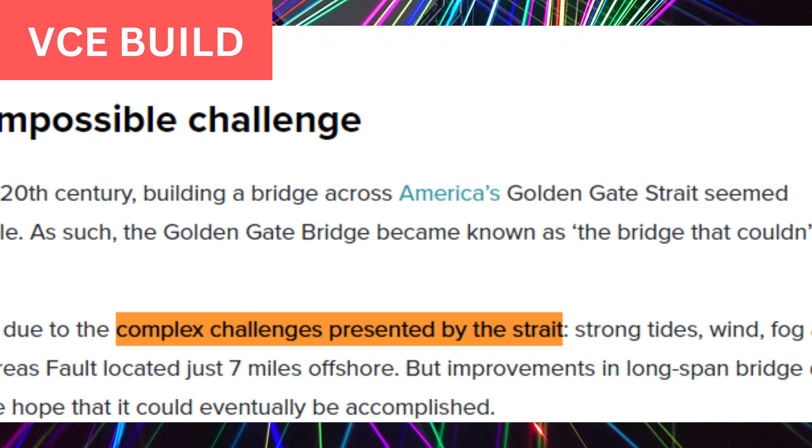Like all projects, challenges were faced during construction. The Golden Gate Strait has powerful tides and currents, which made anchoring the bridge's foundations extremely difficult. Workers had to contend with unpredictable water conditions while building the underwater supports. San Francisco's thick fog and high winds often reduced visibility, complicating the construction process, while high winds tested the stability and safety of the incomplete structure and the workers.

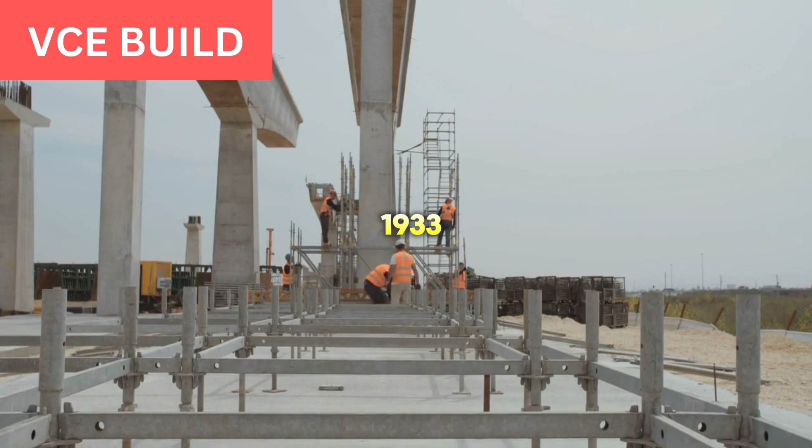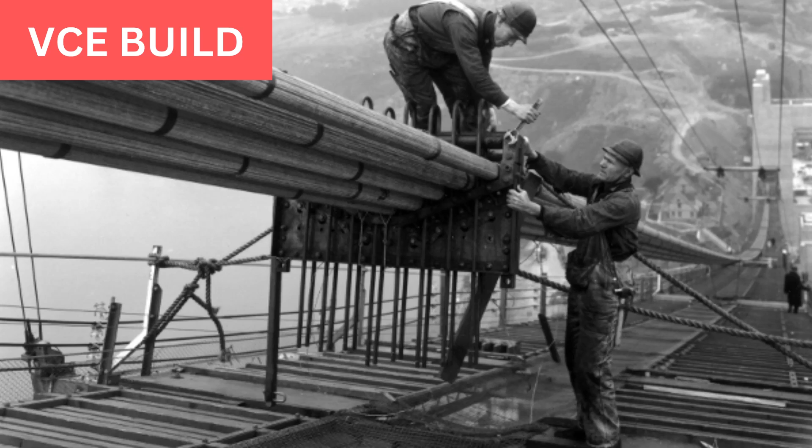Since construction of the bridge began in 1933, during the Great Depression, securing funding was a challenge. Despite this, the construction of the bridge provided jobs and boosted the economy. The design itself had to ensure stability against the strait's strong winds and potential earthquakes. Coordinating the construction of such a massive structure required precise logistics and scheduling—transporting materials, managing a large workforce, and maintaining construction timelines were all complex tasks.

2. The next bridge we will explore is the Tower Bridge, an emblematic symbol of London, constructed between 1886 and 1894, during the height of the Victorian era, a period marked by industrial progress and architectural innovation. The bridge was conceived in response to the need to create a new bridge that would alleviate congestion without disrupting river traffic in the bustling area of London.

Designed by architect Sir Horace Jones and engineer Sir John Wolfe Barry, the Tower Bridge embodies the distinctive Victorian Gothic architectural style evident in its pointed arches, detailed stonework and ornate appearance. The bridge was meant to harmonize and complement the historic surroundings.

One of the bridge's most remarkable features is its bascule, also known as a drawbridge mechanism, which allows the roadway to split and lift so that ships can pass through. At the time, it was a groundbreaking feat of engineering. The hydraulic systems that made this work were powered by steam at that time; it has since been updated to electricity.

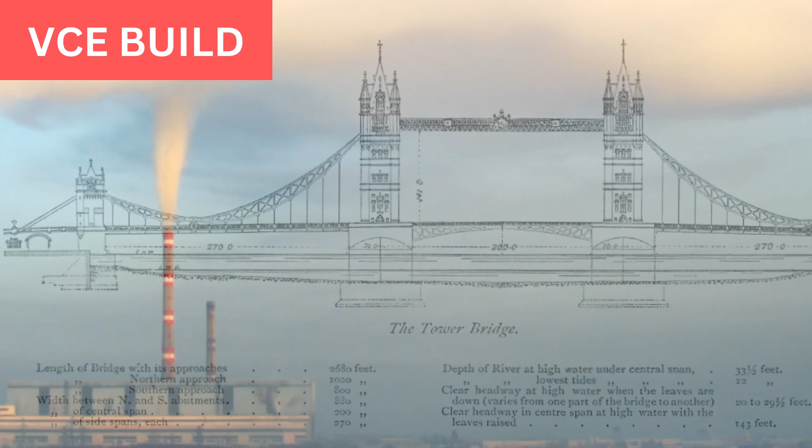Tower Bridge's combination of aesthetic grandeur and mechanical ingenuity not only addressed a critical infrastructural need but also created an architectural icon. Today, it stands as a testament to Victorian engineering and remains one of the most recognizable landmarks in the world. Tower Bridge boasts several unique design features that set it apart as an architectural and engineering marvel.

The bridge's iconic twin towers, constructed in the Victorian Gothic style, are both functional and decorative. These towers house the machinery for the bascules and provide structural support for the suspension elements of the bridge. The design, featuring pointed arches and detailed stonework, ensures that the bridge complements its surroundings. Connecting the two towers are high-level pedestrian walkways, originally designed to allow pedestrians to cross the bridge even when the bascules were raised.

These walkways provide stunning views of London and the Thames, and today they house exhibitions, which makes the bridge not only functional but also culturally significant.

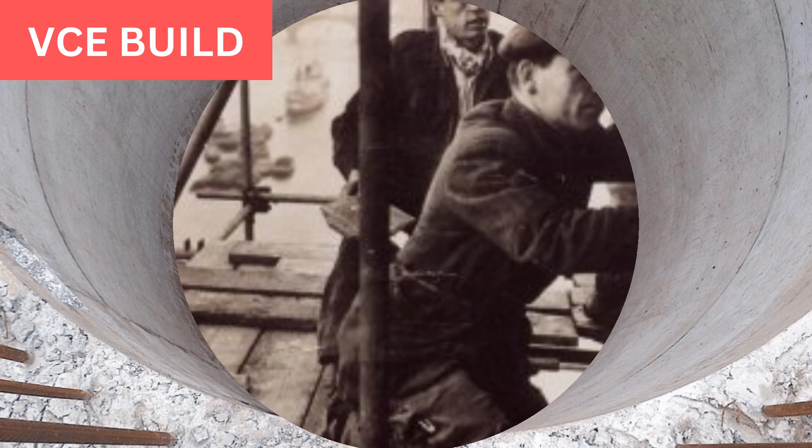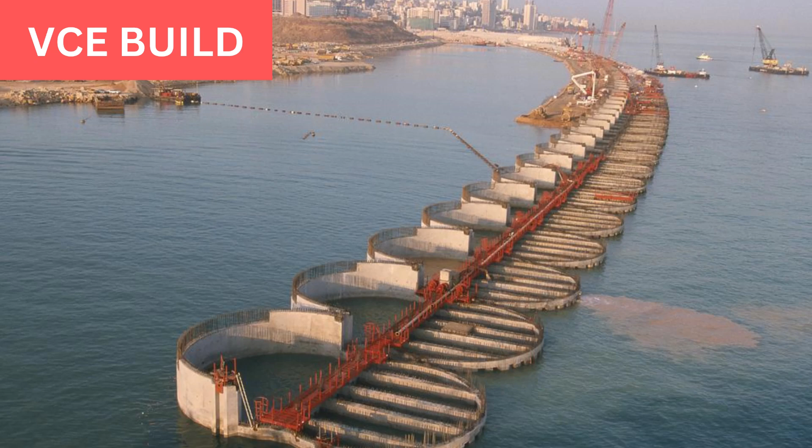The construction of Tower Bridge presented numerous challenges requiring innovative solutions. The riverbed upon which the foundation was built was muddy and unstable. To rectify this, large caissons, watertight structures made of timber and steel, were sunk into the riverbed, and the water was pumped out, allowing workers to excavate and build the foundations in dry conditions.

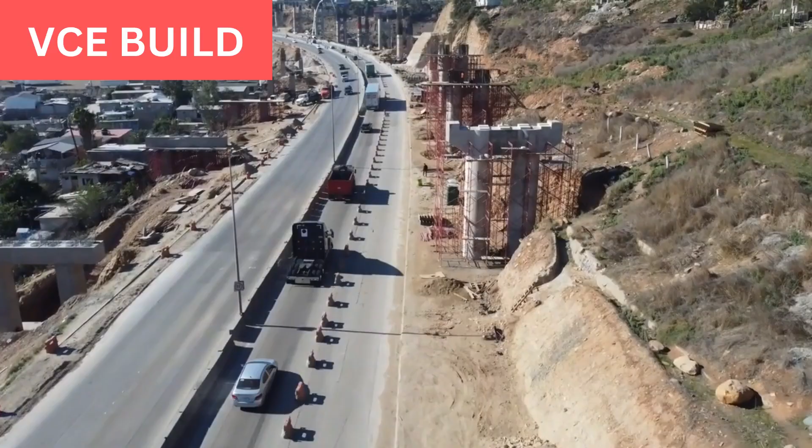Another challenge was supporting heavy loads. The bridge had to support the weight of the towers and the bascules. Suspension chains and robust piers provided the needed support. The towers were constructed with strong steel frames and granite, and Portland stone was also used for added strength and durability.

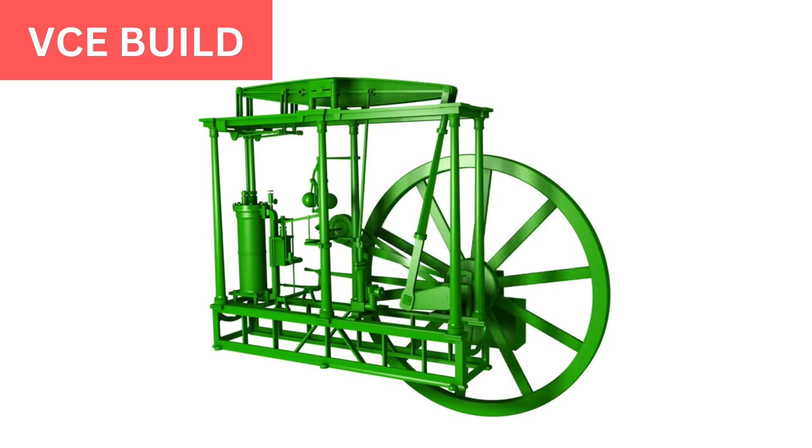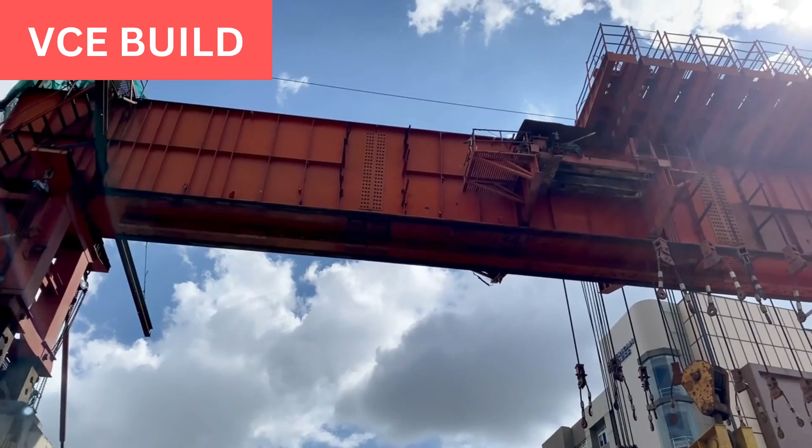Another challenge was designing a reliable mechanism to lift the bascules and allow ship passage while maintaining roadway functionality. Engineers implemented a state-of-the-art hydraulic system powered by steam engines, which operated large pistons to raise the bascules. This system was later upgraded to an electro-hydraulic system, ensuring continued efficient operation.

To ensure that construction did not disrupt vital river traffic on the Thames, it had to undergo careful planning and scheduling of construction activity. The construction was completed in phases to ensure at least one channel of the river was always open for ships. The use of stone cladding on the steel framework provided the desired Gothic look while ensuring the bridge's strength and stability.

By addressing these challenges with innovative engineering and careful planning, the builders of Tower Bridge were able to create a structure that was both functional and visually iconic, enduring as a symbol of London's architectural and engineering heritage.

The Akashi Kaikyo Bridge, based in Japan and also known as the Pearl Bridge, holds the record for the longest central span of any suspension bridge, at 1,991 meters. Completed in 1998 after a decade of work, it was engineered to withstand earthquakes and harsh weather conditions.

The need for the bridge arose after a tragic ferry accident in 1955 during a severe storm, which claimed 168 lives. This incident underscored the necessity for a safer and more reliable crossing.

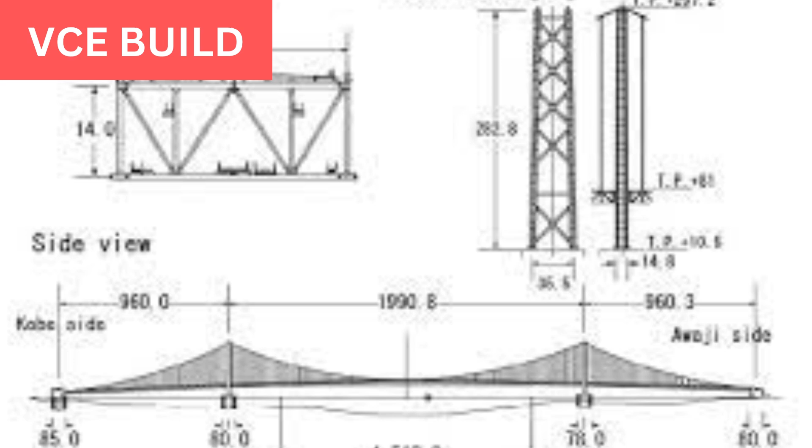The bridge is not only an engineering marvel but also a testament to advanced earthquake and windproof design. Engineers incorporated cutting-edge technology to ensure its resilience against harsh weather conditions, including frequent typhoons and seismic activity. With towers standing 282.8 meters high, the bridge's total length reaches 3,911 meters, supported by 300,000 kilometers of steel cables.

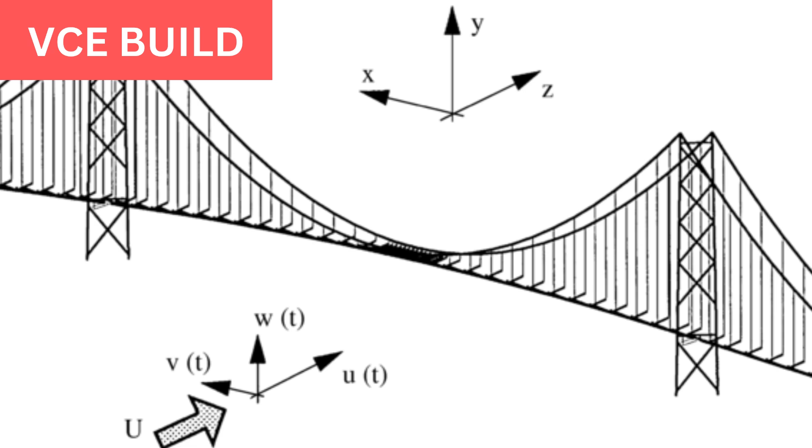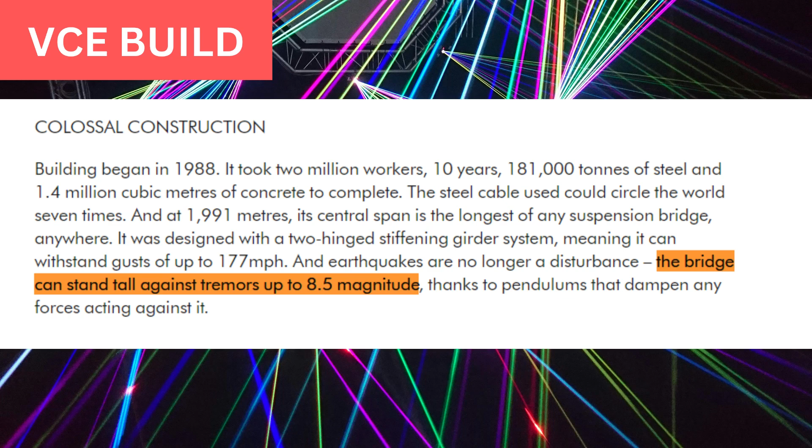For the bridge to withstand potential earthquakes, engineers incorporated advanced seismic isolation techniques, including massive bearings and shock absorbers, to allow the bridge to absorb and dissipate seismic energy. This design ensures the bridge can withstand an earthquake up to magnitude 8.5.

The Akashi Strait presents a major challenge. The bridge experiences strong ocean currents and severe weather conditions, including typhoons and high winds. These factors complicated the construction process, particularly in anchoring the bridge's massive towers.

To address these challenges, construction teams used caissons and specialized underwater techniques to anchor the bridge's foundations securely. They also implemented robust construction methods to handle the harsh marine environment and incorporated weather-resistant materials.

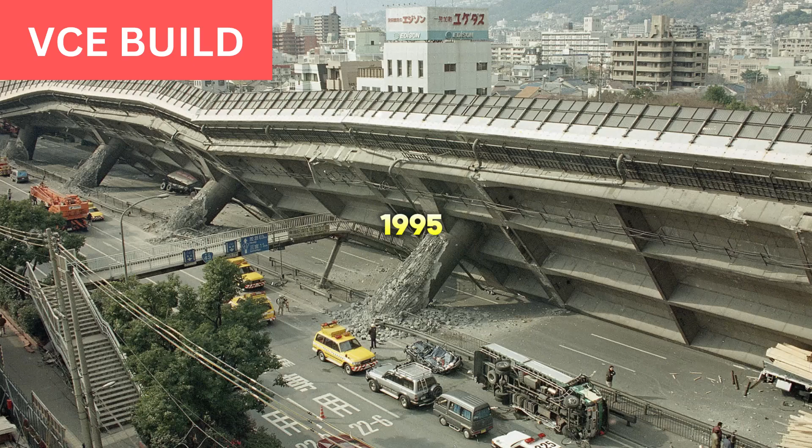The construction was severely impacted by the 1995 Great Hanshin earthquake, which caused the two towers of the bridge to shift by approximately 1 meter. This delay pushed back the project's completion and increased costs.

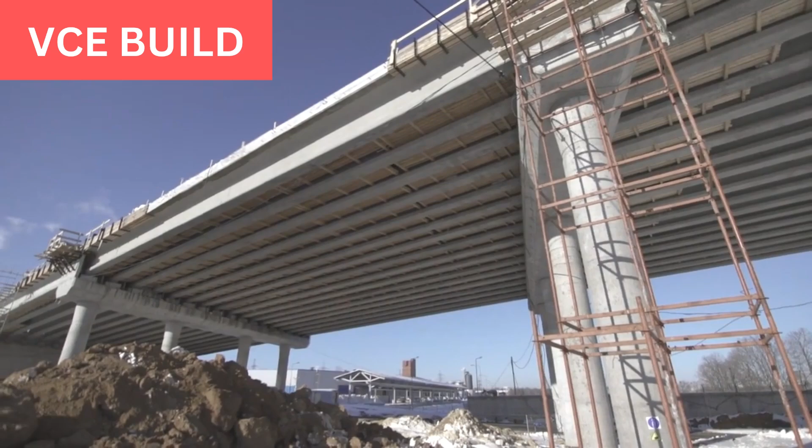After the earthquake, engineers had to adjust the bridge's design and construction plans to address the damage. The towers were reinforced, and the project timeline was extended to ensure the bridge met safety and design standards.

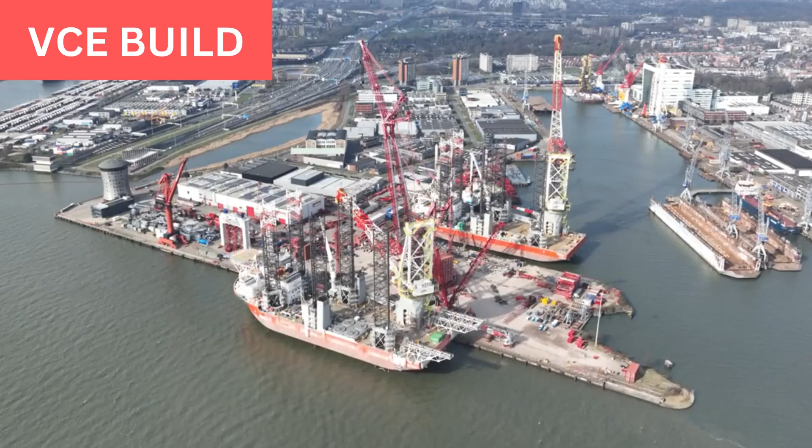The bridge's construction required precise engineering to manage the enormous scale and weight of the components, including the massive steel cables and bridge deck. Engineers utilized advanced technologies for measuring and aligning the bridge's components accurately. Special construction techniques, including floating cranes and large-scale prefabrication, facilitated the assembly of the bridge's massive elements.

Building a structure of such scale in a busy maritime area raised significant environmental and safety concerns, particularly regarding pollution and the safety of maritime traffic during construction. Measures were taken to minimize environmental impact, including using barges and careful management of construction materials. Safety protocols were strictly enforced to protect both workers and maritime traffic.

These challenges, along with natural disasters, highlight the engineering ingenuity and resilience required to complete the Akashi Kaikyo Bridge, making it a landmark achievement in modern civil engineering.

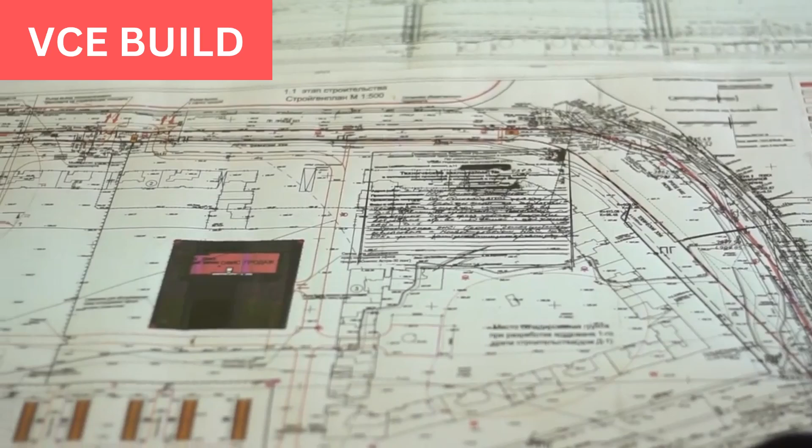The Sydney Harbour Bridge, sometimes known as the Coat Hanger due to its distinctive arch shape, was completed in 1932 and remains one of Australia's most well-known landmarks. We will delve a little further into some interesting elements of the bridge, including the challenges faced during construction and innovative methods used to construct it.

Designed by engineer John Bradfield, the bridge was built to connect Sydney's central business district with the northern suburbs, addressing the growing transportation needs of the city. Construction began in 1923 amid the Great Depression, a period of economic hardship, and the bridge's development was crucial for boosting employment and supporting economic recovery.

The Sydney Harbour Bridge is a vital piece of infrastructure, significantly improving transportation across the harbour and fostering urban growth. It has become a symbol of Sydney's progress and resilience, often featured in celebrations like New Year's Eve fireworks and national events. The bridge features a massive steel arch that spans 503 metres across Sydney Harbour, making it one of the world's largest steel arches.

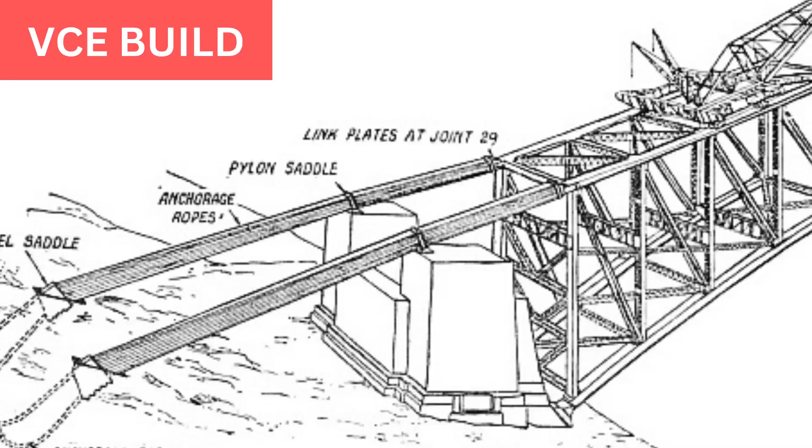The arch is supported by massive concrete and steel pylons at either end. The arch design allows for the long span needed to cross the wide harbour, providing structural stability and allowing for the bridge's road and rail components to be positioned below it.

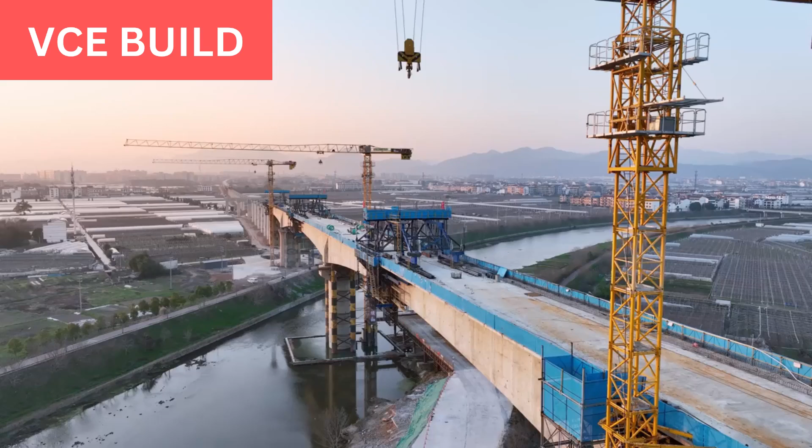Construction process and obstacles faced. The construction of the Sydney Harbour Bridge faced several significant obstacles, which required innovative solutions and perseverance to overcome.

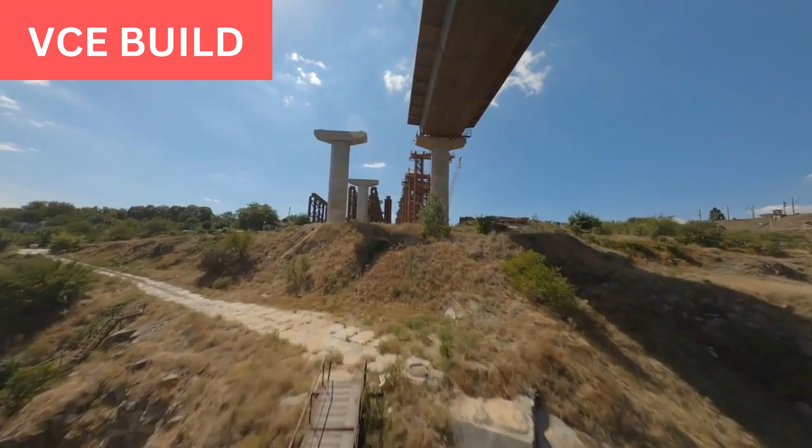Obstacle: the bridge was built over a busy harbour, requiring construction to be carried out in a challenging marine environment with strong tides and fluctuating weather conditions.

Solution: engineers employed innovative construction methods such as cantilevering sections of the bridge from both sides of the harbour, which minimized disruption to maritime traffic. Temporary platforms and safety measures were used to manage the challenging conditions.

The construction involved working at great heights and in hazardous conditions, leading to concerns about worker safety. Aligning and connecting the bridge's massive steel sections, especially those built on either side of the harbour, presented significant technical difficulties. Engineers employed precise measurement and alignment techniques.

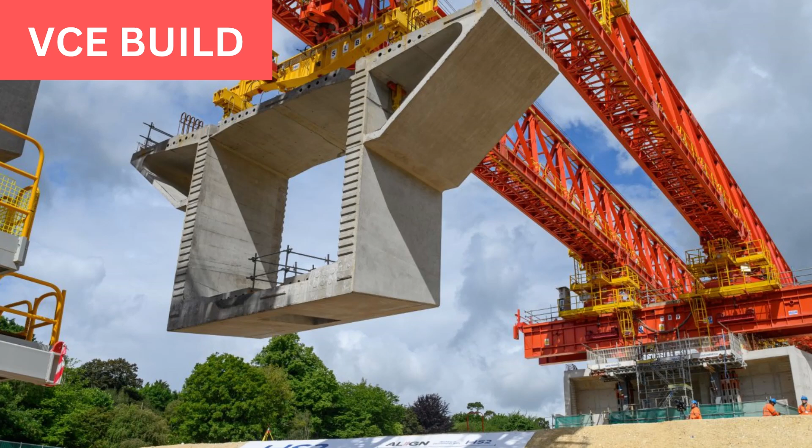The use of hydraulic jacks and other advanced tools of the time facilitated the accurate assembly of the bridge's components.

The construction impacted the local marine environment and required careful management to minimize pollution and disruption to the harbour. Environmental regulations were followed, and construction practices were designed to mitigate pollution. The project also included provisions for the ongoing maintenance of the surrounding area to address environmental concerns.